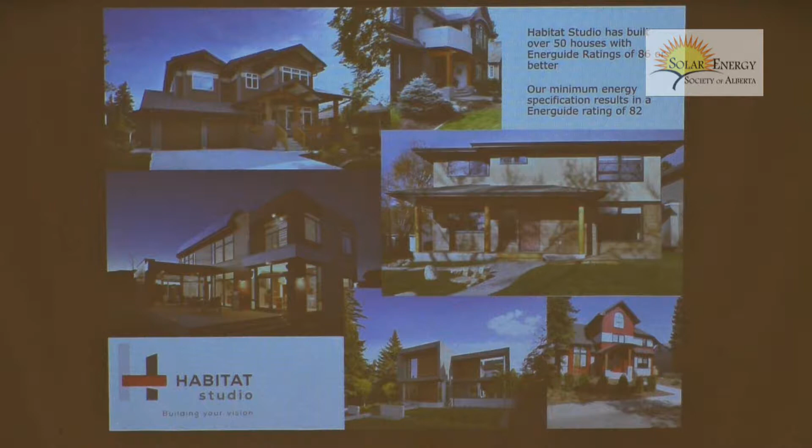So as Rob said, we've built - we're actually over our minimum Energuide rating, it's actually around 82. We still will build houses like that if people are utterly uninterested in building the house we would like, which would be about Energuide 86, and we've done about 50 of them now.

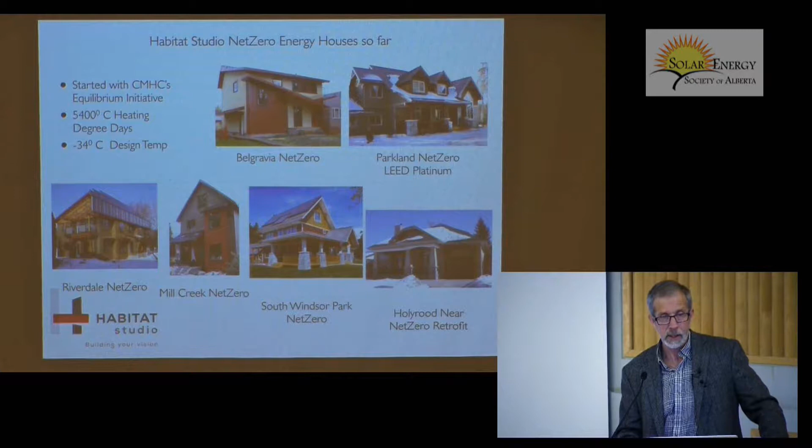They're getting to be more common than the Energuide 82 houses, and we started our net zero journey in 2007 with the Riverdale project, built under the CMHC Equilibrium Initiative. That project brought a number of other projects sequentially, one at a time, about a year per project, and it allowed us to learn at a manageable pace and try new things, finally refining what we think is a best practice approach that should be good for quite a while.

And it's one of the things that makes me confident that net zero really is ready for prime time. So right now we're working on 4 more. 3 of them are nearing completion, should be done in a month or so, next couple of months at the most, and 2 of these are on the Eco Solar Home Tour.

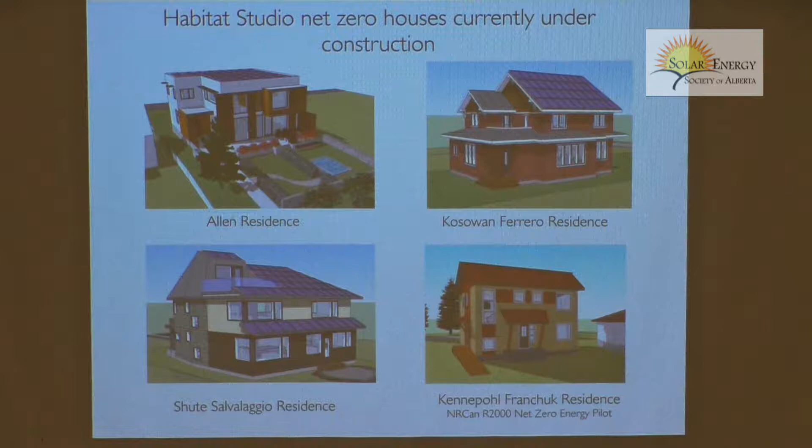One of them is being built under the NRCan R2000 Net Zero Energy Pilot Program, and the owners, Dietmar Kennepohl and Roberta Franchuk, are here tonight, and I want to especially thank them for letting us do that on this project.

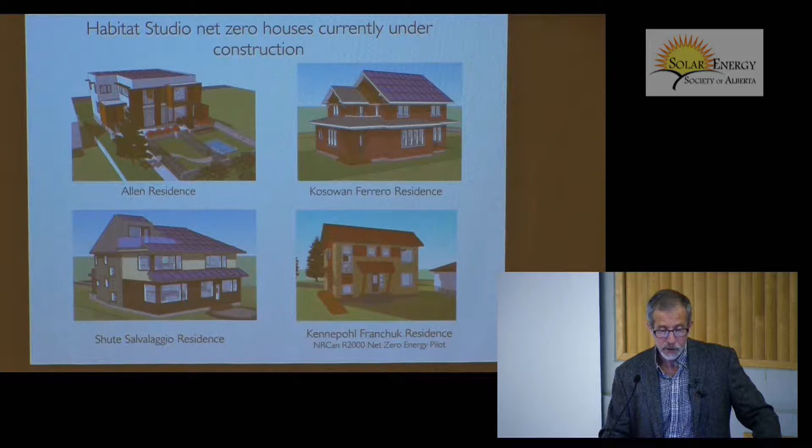Just to zoom out to the rest of the world, I've been involved with the Net Zero Energy Home Coalition for quite a while. It was started back in 2004 here in Alberta, and has been a booster and an information source for net zero energy for a while.

In the last little while, it was always intended to be North America wide, but it's moved over to almost entirely the U.S. What happened was the Canadian Home Builders Association started a Net Zero Energy Council, which took most of the funding, so now this is mostly an American organization. I was just at the summit in Boston a few weeks ago, and there's a fair bit of pretty cool stuff going on in the U.S.

There's a lot of net zero energy activity. There are a number of small builders who are doing exclusively net zero energy houses in the Northeast and making a go of it. Some of the great big mass home builders that build 10,000 houses a year have now got net zero energy offerings, and the U.S. DOE, the Department of Energy, has gotten into it in a pretty serious way, in advocacy, encouragement, and training, and I'll talk about them in a bit.

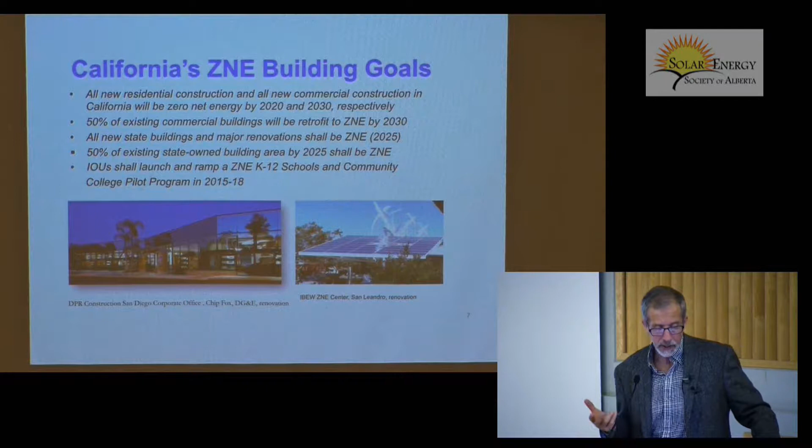But California has committed to net zero energy in all new residential construction by 2020, 5 years from now, and including by 2030 for commercial buildings. They're aiming at a retrofit program that will start to take existing buildings to net zero energy, and they've been very proactive in doing this. It's been remarkable to me, in the sort of home of the brave, land of the free, that they've taken such an apparently intrusive approach to this.

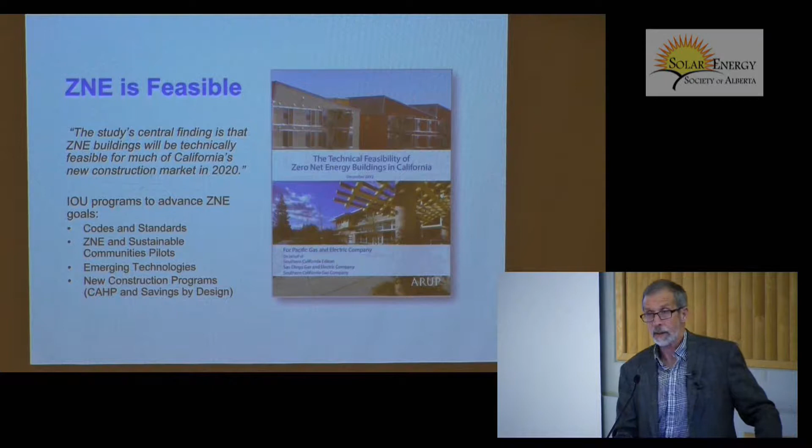It's very encouraging. But California is actually seeing the effects of climate change worse than anybody else. They've also got it easier than anybody else, particularly in the solar department and the heating department. But I think it's still really encouraging. A large number of trends that we see in North America start in places like California, and it's very hopeful. So the other place that's a real hotbed is Massachusetts and the Northeast in the U.S.

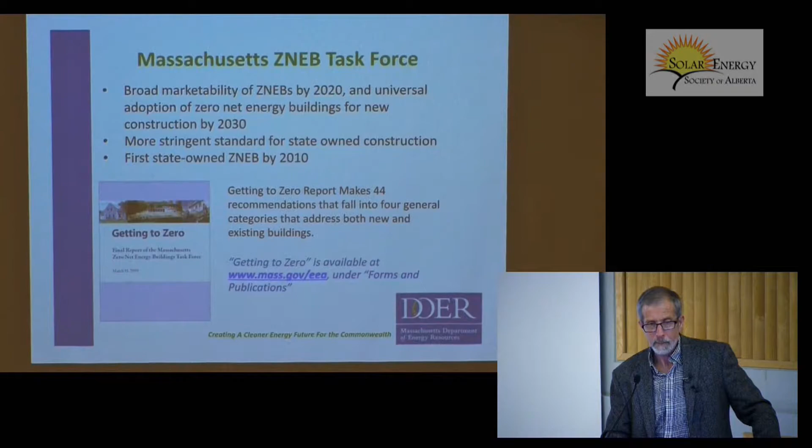Massachusetts has a very active program encouraging net zero energy buildings. And it was kind of funny in this session, I ended up chairing this, moderating this policy and program session, and I, who know absolutely nothing about policy or programs, got to see these representatives from California and Massachusetts kind of having fisticuffs over who had the best program. That was encouraging in itself.

But the utilities down there are getting quite active as well. They're seeing conservation as an alternative to building more generating capacity, and looking to the day when they're not in the business of really selling energy so much as managing the grid and keeping it reliable, more like an internet provider where the content comes from somebody else, a lot of it from renewables, and they make their money on a monthly fee. And as such, they've got lots of programs that they put real money into that have incentives and encourage people to do the right thing.

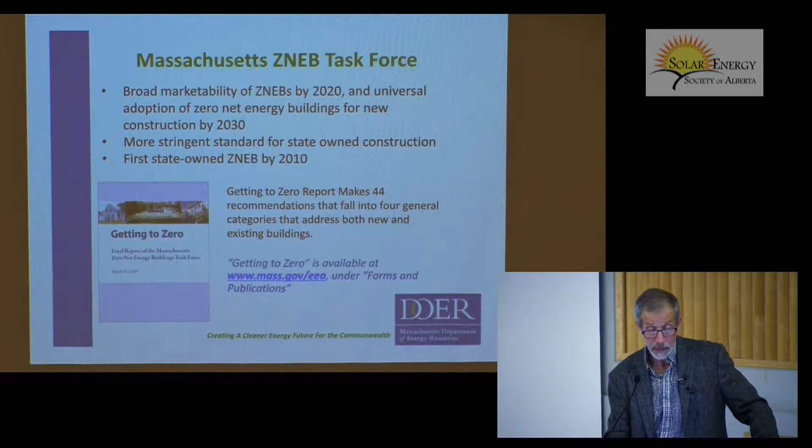One place that was really remarkable to me was the city of Cambridge, Massachusetts. They've committed to carbon neutrality for the entire city. They do have some advantages, including transportation. They're a relatively small city, about 100,000 people, a fairly compact city, and they've got a highly educated population. It's a city full of scientists, basically, who totally get the predicament. And they've got terrific support from their state government.

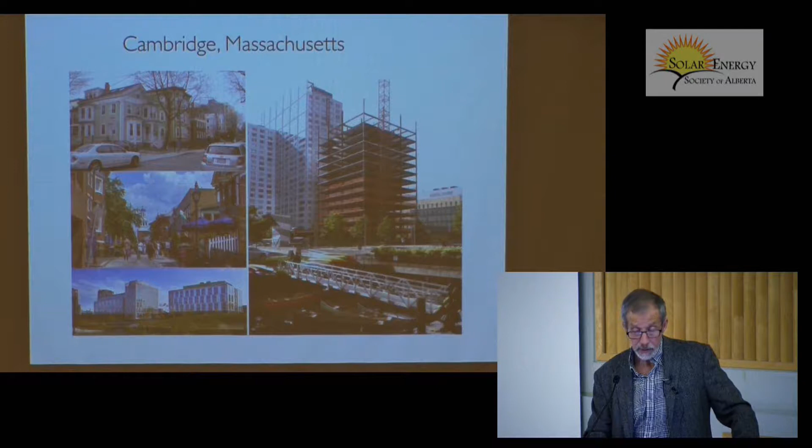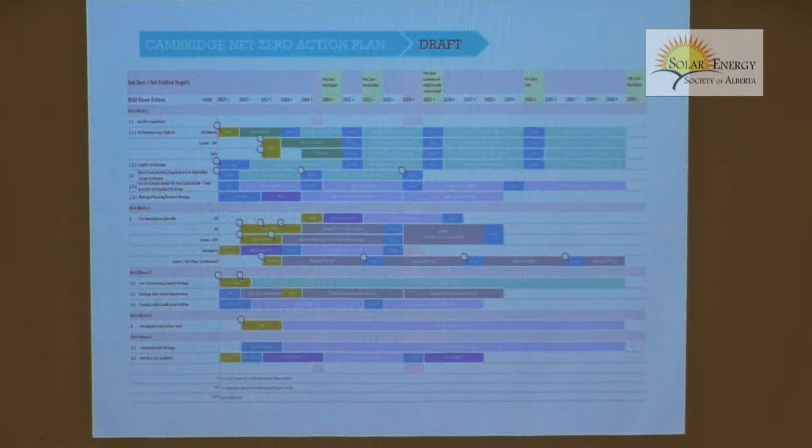So they've mapped out a step-by-step, sector-by-sector approach: transportation, buildings, commercial, institutional, everything. They started with an energy audit of the entire city to establish benchmarks, and then they've developed reduction programs across all of the sectors, and an action plan. And the work that they've done has been, I think for others, basically a gift to the world in terms of the policy work that they've done. We'll be able to take that kind of material and plug into it really.

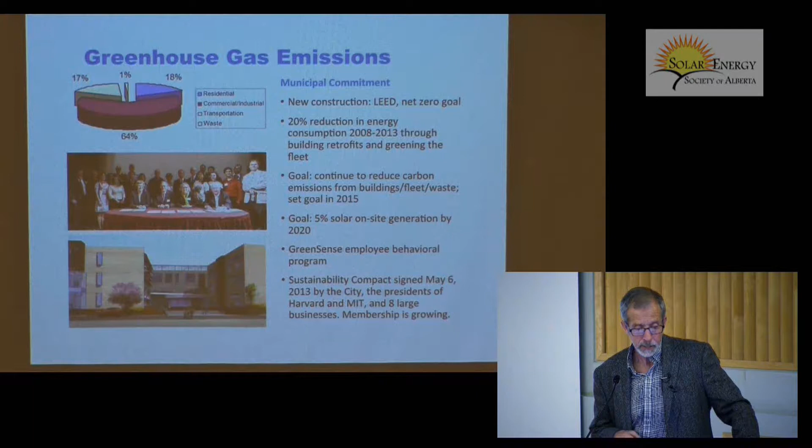And for them it's about greenhouse gas emissions. They've got terrific buy-in at the municipal level and from big partners. So their map looks something like this. They expect to reach 70% of carbon neutrality by 2040.

Watching this as an Albertan, I had a complex mix of emotions. One was hope that somebody's finally doing something somewhere, an admiration for the leadership, and then envy that it's happening there and not here, and then a little bit of shame that we really haven't got started. Did you know that Alberta is the only jurisdiction in North America that has no incentive or encouragement programs for retrofitting houses?

Yeah, it's hard to imagine. One of the bright spots is here in Edmonton. The new energy transition strategy looks really good. It's hanging in the balance at City Council right now. I think it's really important that we support the people at the city who have developed it and brought it forward. If you can get out to that City Council meeting, and I don't know the date of it, write letters to the paper, write letters to your councillor.

It's really critical that our voices are heard in the right direction. Otherwise, we could be waiting a long time. It'll be helpful, I think, if the city acts—there's a better chance of the province moving.

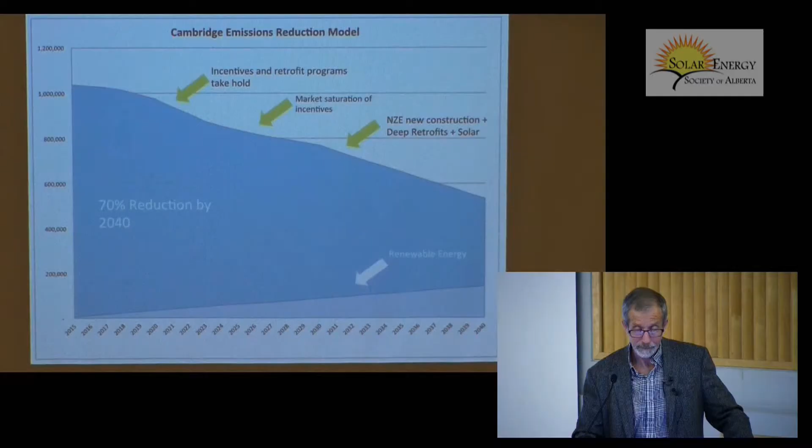It's really important. So the U.S. Department of Energy has a branch that used to administer the Energy Star label, similar to our EnerGuide rating—not quite the same, but basically a package of upgrades to houses, and they also do labeling of equipment and that sort of thing. So they've taken this Energy Star program and turned it into something they call Zero Energy Ready.

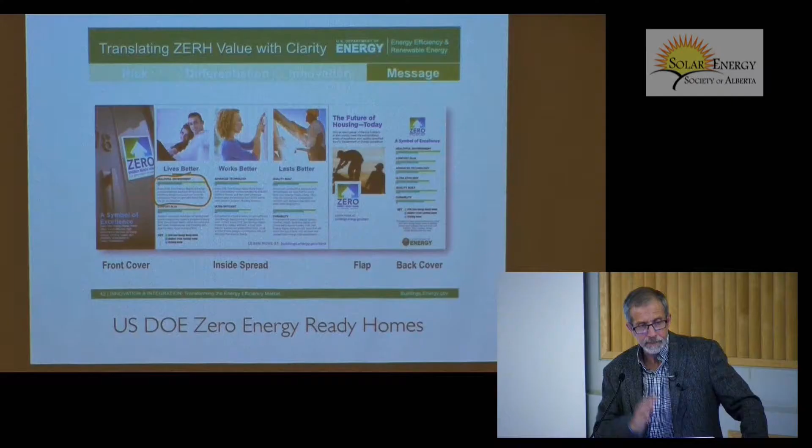They opted for a slightly different term because they're worried about liability—you can build a net zero energy house, but if the people living in it aren't net zero energy people, there's a good chance it won't perform that way. So they took this safer, more inclusive role, because it also includes houses built to a certain standard that have demonstrated that if you were to put renewables on them, they could be net zero. This is a big deal when a big player like this gets into the net zero space.

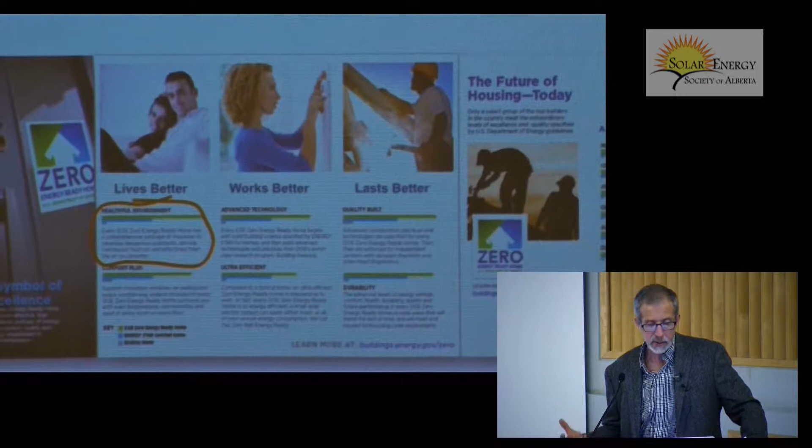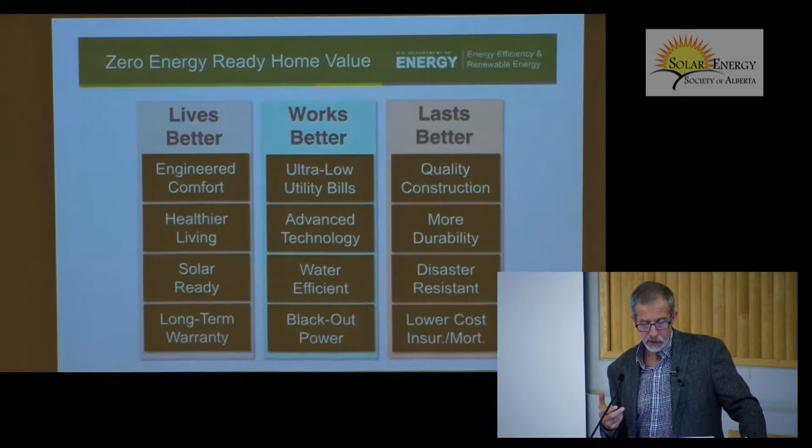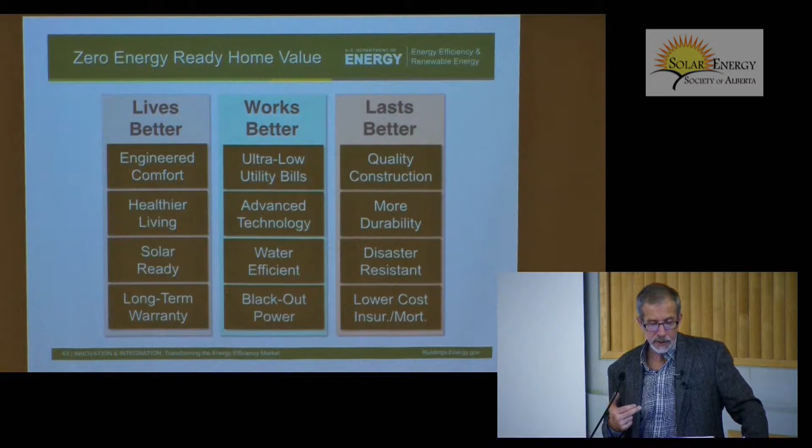The builders need training. They need to pass a course, all the buildings are rated and inspected, so you've got basically Uncle Sam's stamp of approval that you're getting what you paid for. They realize—and Sam Rashkin, the chief architect at the DOE, who's really the driver for this stuff, understands—that builders can't sell these things unless people want to buy them. So he's done a lot of work establishing a value proposition for these houses, similar to the work done in Canada for the R2000 program.

There's no doubt that these houses are more comfortable, healthier, cheaper to operate—they're just plain better houses, and it's time that they be sold that way. It's frustrating as all get out that, like the R2000 program, we can't actually sell this stuff on the basis that, to me, is real value: the fact that it's something we have to do to keep the planet habitable.

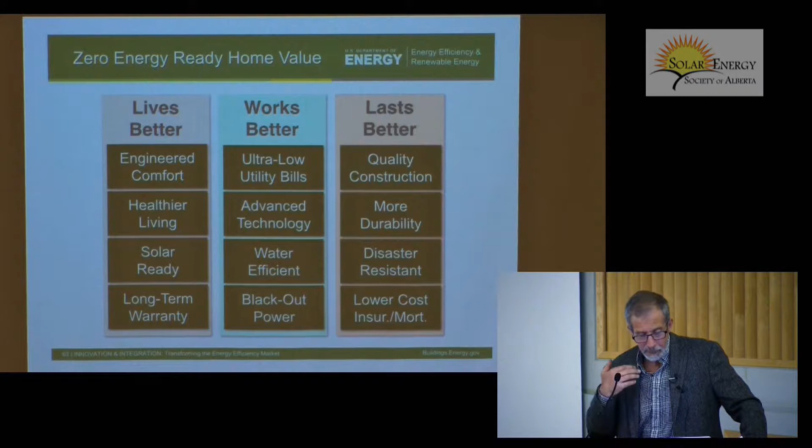The established wisdom seems to be that you can't talk about this stuff—you can't sell it on the basis of being better for the environment or saving the planet. You've got to sell it on these kind of side benefits and hope for the best. I really dearly hope that'll change.

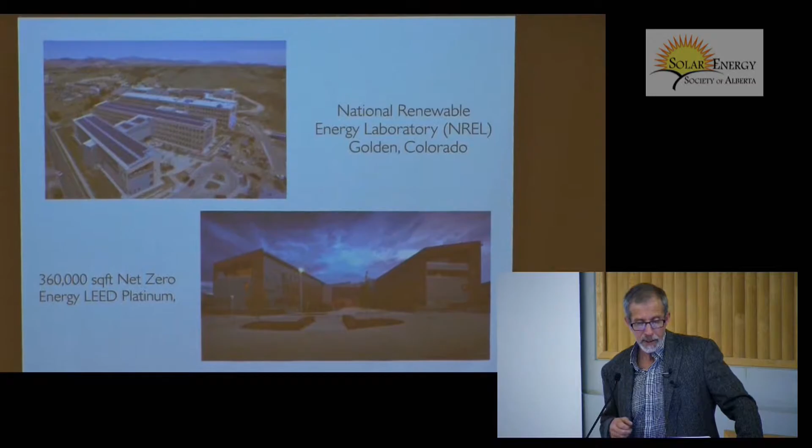So there are also, in the U.S., a number of commercial buildings that are net zero energy—not very many for the size of the country—but the biggest is probably the National Renewable Energy Lab. It's kind of appropriate, like who else should build net zero? That was built, I think, in 2010, and they were given a budget with no extra money in it, yet they were able to build a net zero energy building within that budget.

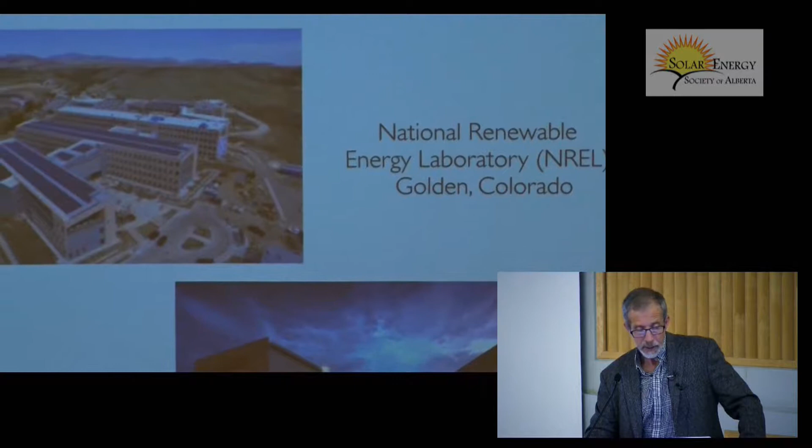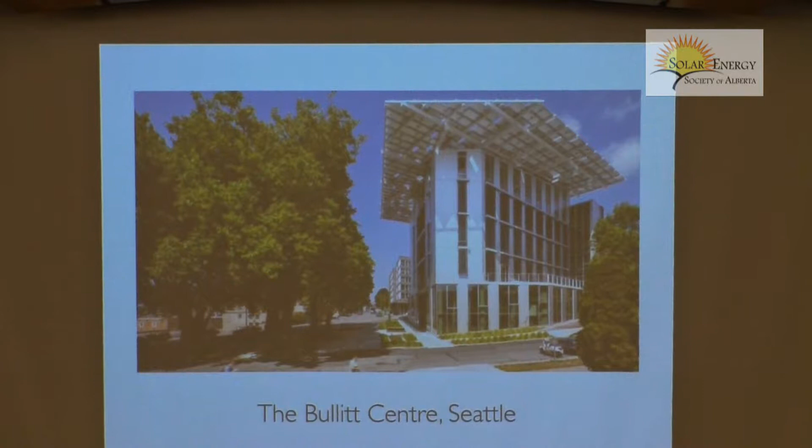Now, another one you may know about is the Bullitt Center in Seattle. This is a LEED Platinum, Living Building Challenge certified building. It's net zero. You can kind of see what happens when you try to go with a multi-story building and get to net zero—you run out of roof area pretty fast, because the process loads in the building, the lighting, even the cooling and heating go up, but the roof area doesn't, unless you can do something like this.

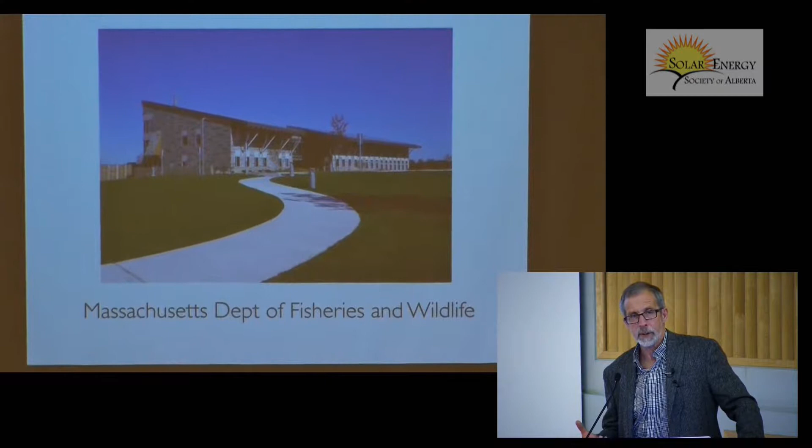Another interesting building we saw in Massachusetts was the Department of Fisheries and Wildlife, in keeping with the Massachusetts state commitment to not only encourage this stuff, but to put their money where their mouth is. This building is also very high quality, beautiful, daylight filled, very comfortable, and net zero energy. I think it was finished in 2013. They've got a year of data—it's actually net zero, and a great example for the rest of it.

And then right here in Edmonton—I'm not going to talk about this, just a sneak preview—we've got our own net zero energy commercial building. So if we can do it at scale, we can sure do it.

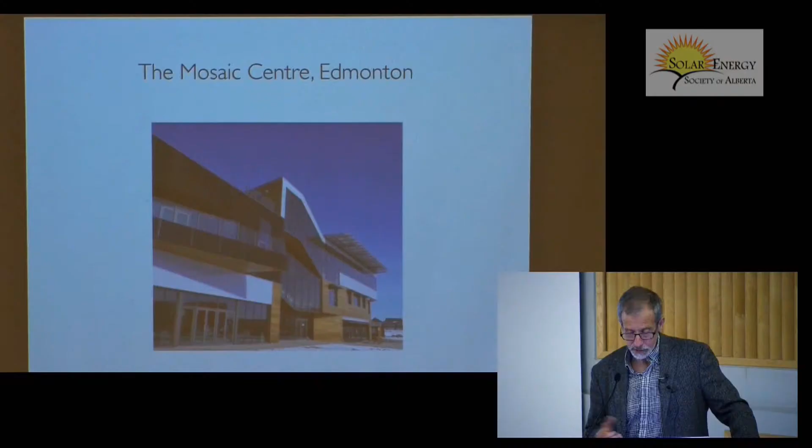We can sure do it on houses. So back here in Canada, the CHBA has established what they call a Net Zero Energy Council, and their goal is to bring resources to builders so that they can do this more cost effectively. That involves training and information sharing. They're also trying to help build the market.

Everywhere we turn, really, we've got the same problem. We know how to do this stuff now. It's not a technical problem anymore, it's a marketing problem. We need to convince people to act in their own interest. I don't know, you say something like, we need to build houses like this or we're all going to end up fighting over scraps of food in the desert. I don't know what it takes, but we need to work on that marketing piece that will start to get people acting in the interests of their kids and grandchildren.

Anyway, the other thing that NRCan is doing, or that the CHBA is doing, is working quite closely with NRCan to develop a new net zero energy label based on the new EnerGuide rating system. The rating system is undergoing a change, and we're going to see this come out end of this year, early 2016.

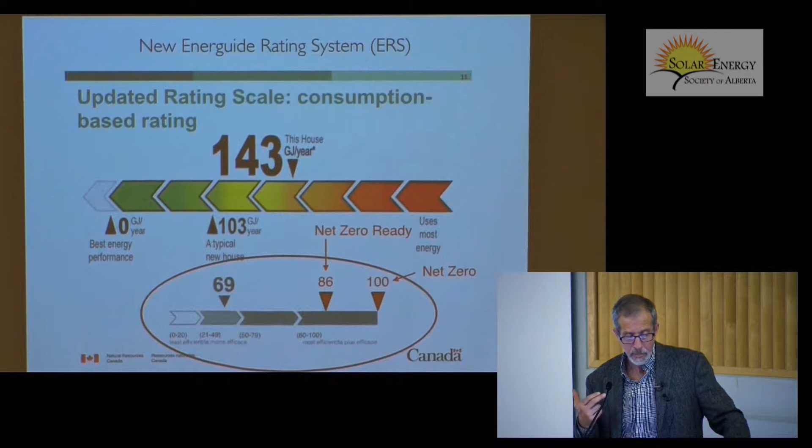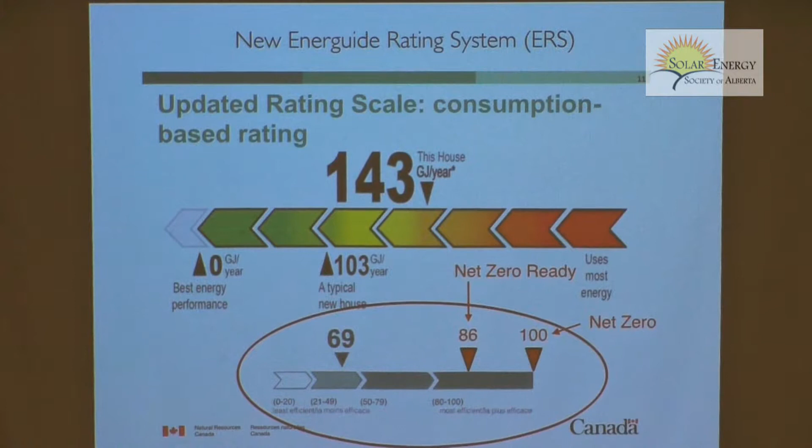Nobody seemed to understand the old EnerGuide rating system. It wasn't a straight line, it was logarithmic, and it took quite a bit of difference to change a house from EnerGuide 86 to 88. Also it was kind of counterintuitive that net zero would be 100 and the worst possible house you could build would be 0.

So they flipped that around and made it a consumption-based rating. Your score is basically going to be how many gigajoules a year you use. If you have a net zero energy house, it's going to be a 0 gigajoule house. They'll also turn that into a label, they've done a lot of thinking about it, and there's all kinds of other information on it. This is just a snapshot of part of it.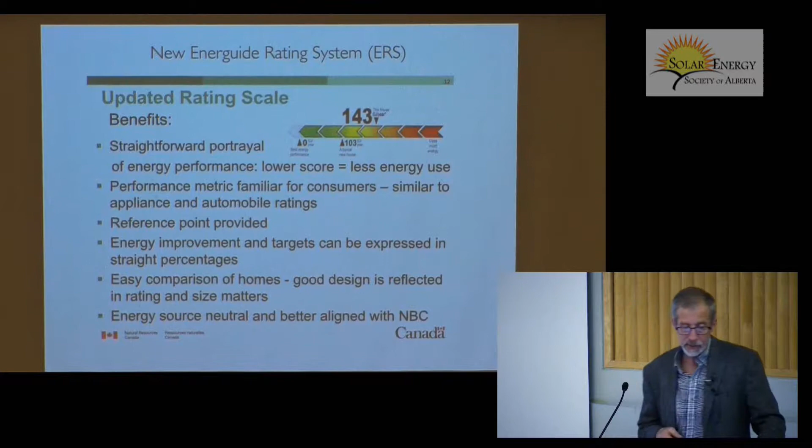But it will be much easier to understand, and it will be the foundation for the net zero energy label that you'll be able to get along with your new EnerGuide rating. It's got a number of benefits. It's very similar to the appliance and car ratings, gives you a reference point to an average house, and you can express improvements in just percentages.

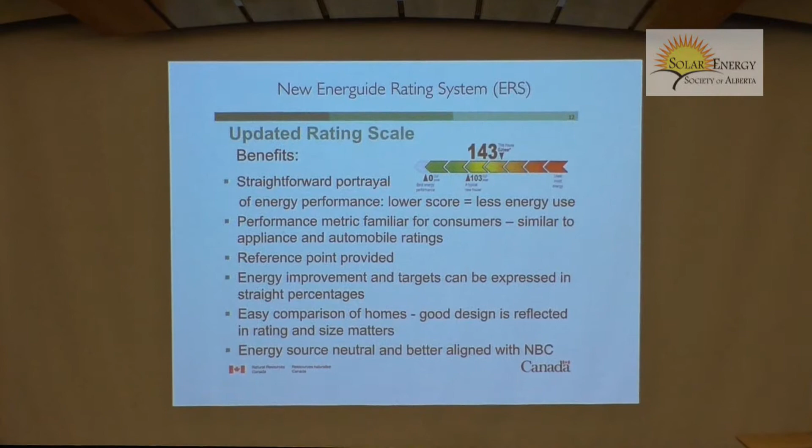That didn't work when it was logarithmic. The old EnerGuide rating system was also different depending on the size of the house, whereas this is just going to be straight consumption. If you've got a smaller house, you're going to get a better EnerGuide rating, and that, I think, is as it should be. But it will not look at the energy source in any way - it's not going to compare natural gas to electricity or coal-fired electricity or heating oil.

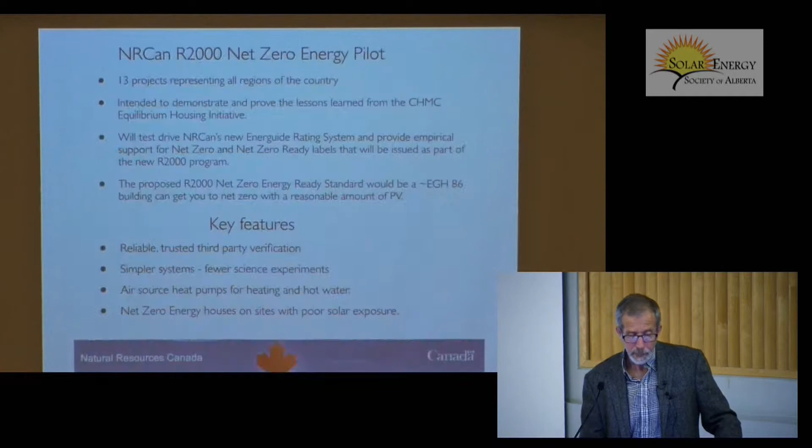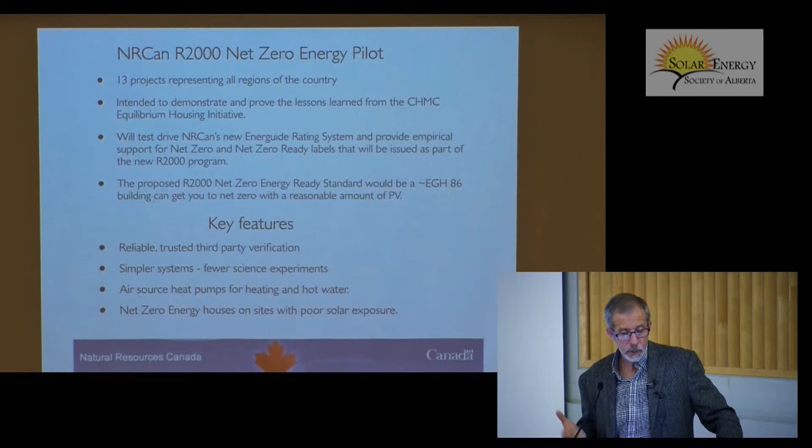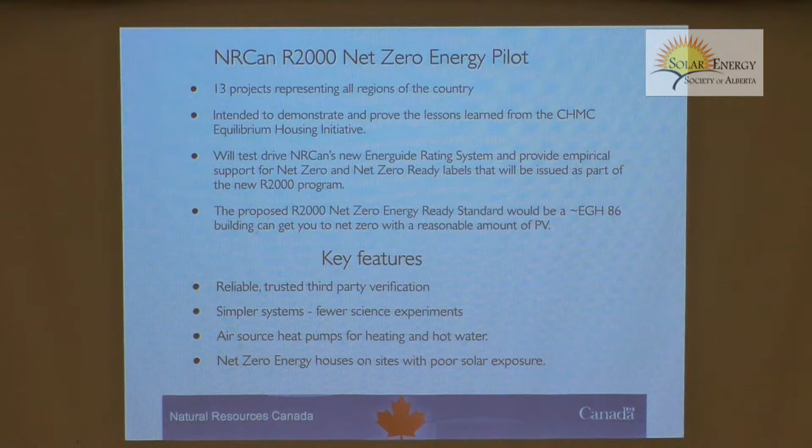So the Dietmar and Roberta's house that we're building is part of another national program run by NRCan, and all of the houses will have to meet the old R2000 or the new R2000 standard, which is now EnerGuide 86 in the old scale. There are about 13 across the country. Dietmar and Roberta's is going to be the first one finished.

The idea is that there are no more science projects - this is road ready, off the shelf solutions. It's going to test drive this new EnerGuide rating system. The EnerGuide or Net Zero Ready label they're hoping to come out of this would be at least an EnerGuide 86 on the building without renewables, and then a demonstration that there's enough capacity in the roof to install enough renewables to get you there.

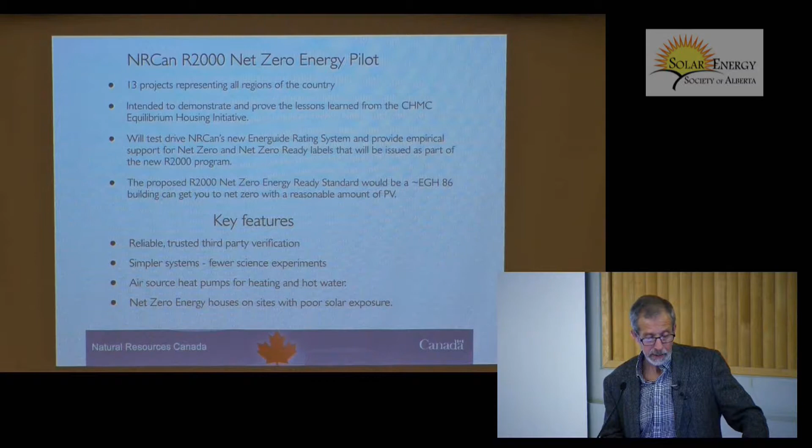Yeah, so this is a rough look at Dietmar and Roberta's house. Again, the house will be on the tour, so you'll be able to have a better look at it on May 30th. It's about 2,250 square feet with a finished basement.

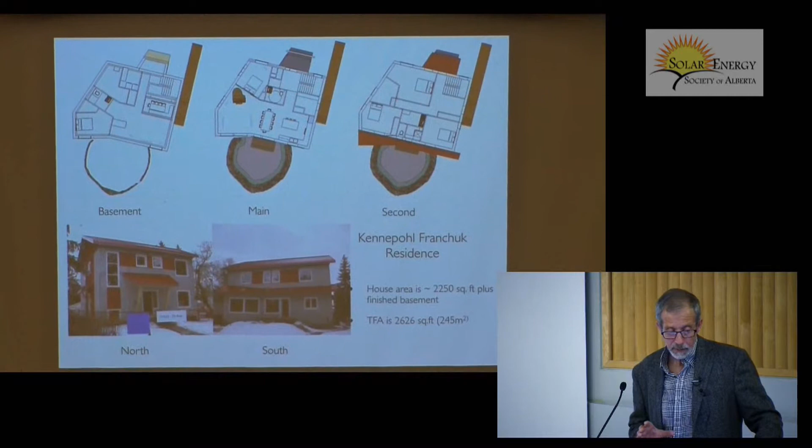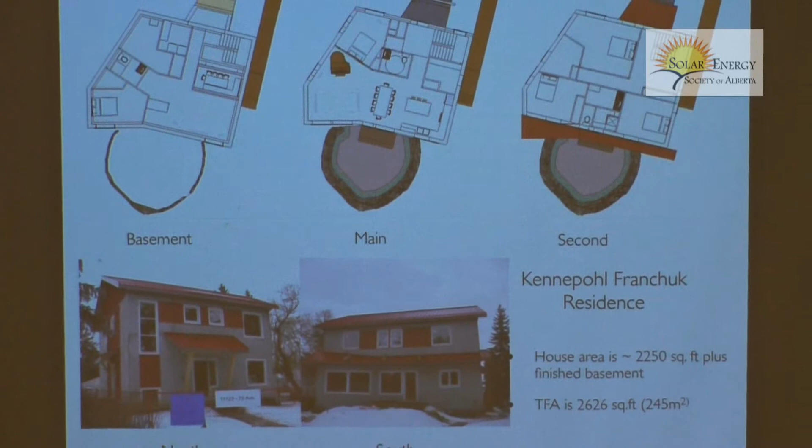It's getting close to complete. We need to do the finish coat of stucco and obviously install the PV. The house is custom designed to their lot, which is a kind of a funny shaped lot. There's a bunch of trees across the street, so there is some shading. We took down a great big elm tree that we've actually sawn up and made into the railing and stairs and a few other things in the house that we're pretty proud of. You'll be able to see that at that time.

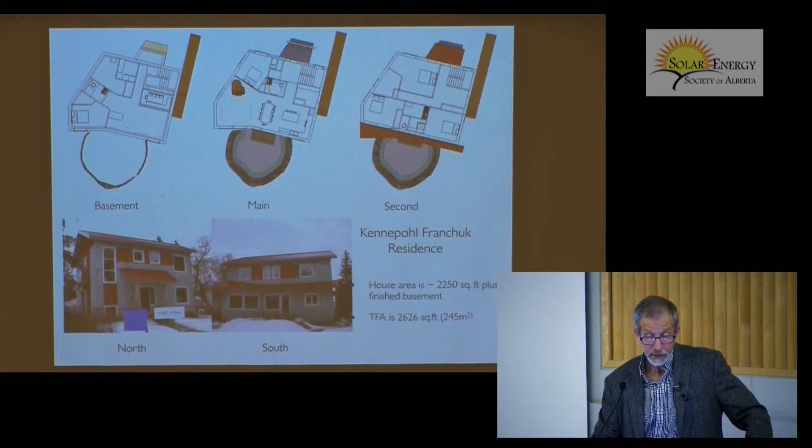Now I'm going to go to a little more territory that we've gone over before, but I think it's important for people who aren't here to go through the basics. We've figured out how to do this in a really straightforward, step-by-step manner that's not that much different from designing an ordinary house. It's just one more constraint, and if you attack it in the right order, it's relatively easy. We found this out the hard way.

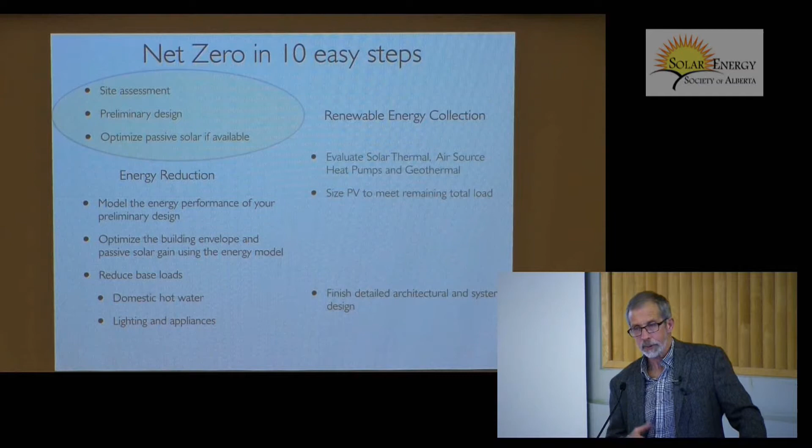We did it a few times and noticed that you don't design the PV system first. I'm just going to run you through these steps and a few things we've noticed along the way. It doesn't need a big charrette—it's ready for anybody working anywhere. And the fact that we now have, we counted 34, 35 net zero energy dwellings in the Edmonton area now, is a testament to the fact that we know how to do this.

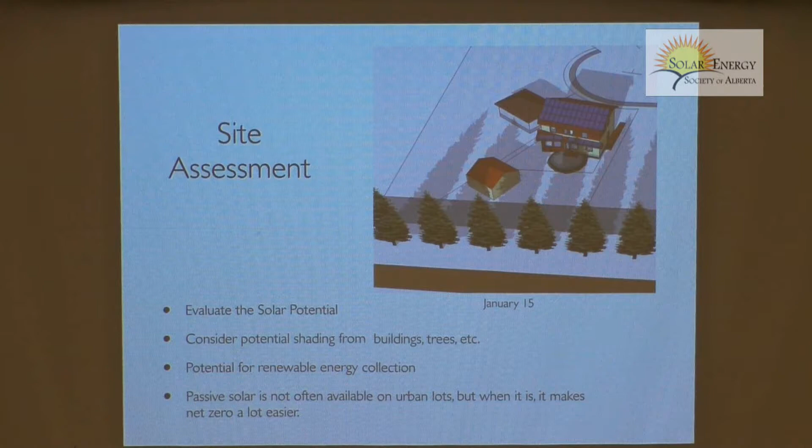We can do it. So the first thing is to evaluate the site, look at the potential shading, look at the amenities for designing the house, and I'm always looking for passive solar because that's the cheapest, easiest way to get to net zero. Then the preliminary design happens with that in mind—keeping it simple and compact, and thinking about where the PV is going to go. It helps a lot to keep the living spaces on the south side if that works out.

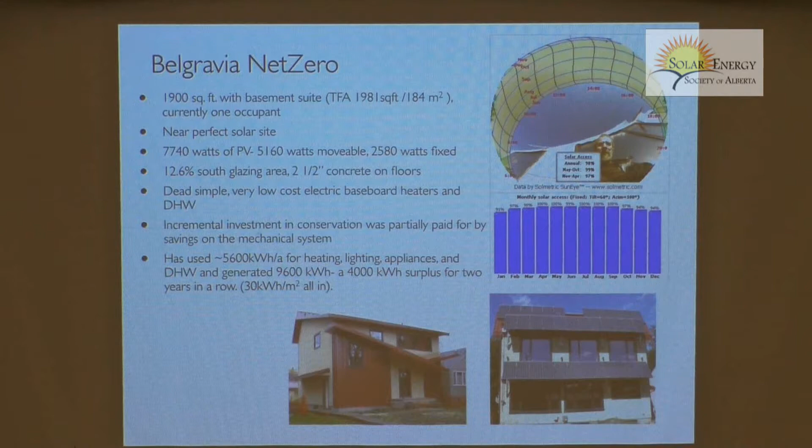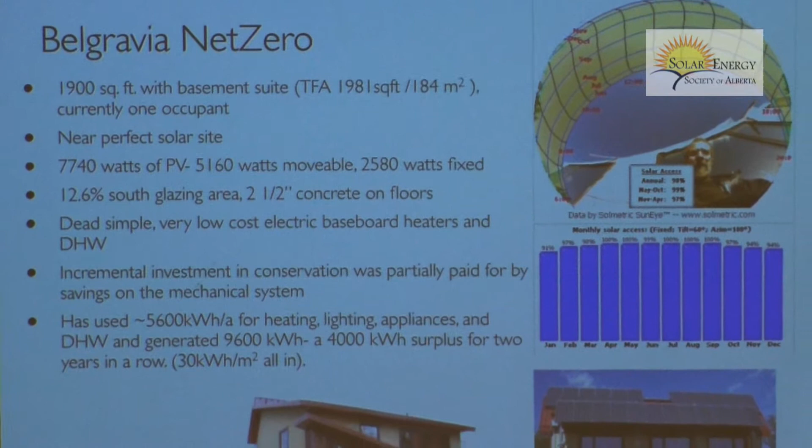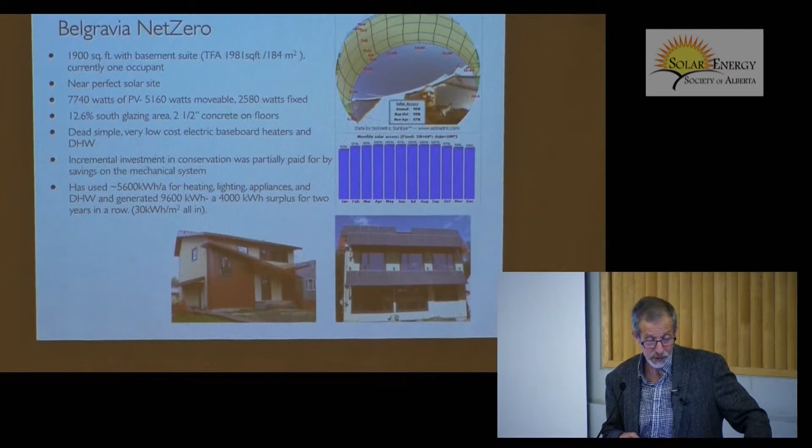It's not critical anymore, but the case in point is our net zero home run—this was our third house. It's a house in Belgravia that over the last 3 or 4 years has produced close to 10,000 kilowatt hours a year of electricity and used about 5,600. Part of that is the owner, who is very conserving—I joke that he probably showers at the Kinsmen—but even so, with over a 4,000 kilowatt hour surplus, a family of 4 could live here comfortably without any sacrifices whatsoever. The main reason this house is so successful is that it's a perfect solar site.

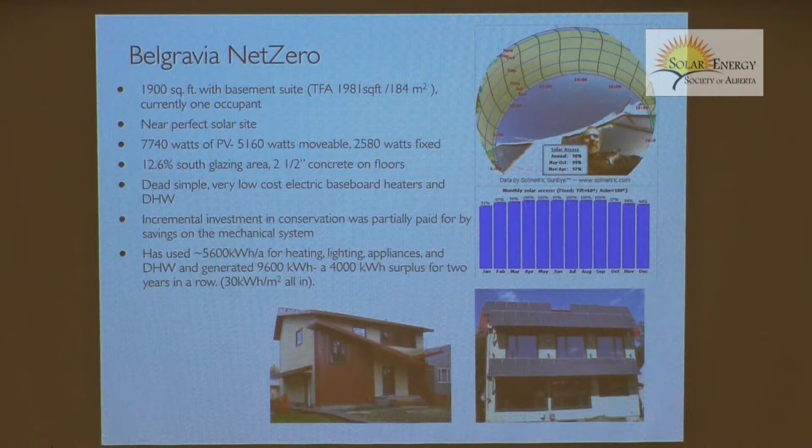Not only is the PV system producing very well, but it's getting over 50% of its annual space heat needs through the south-facing windows. Unfortunately, when we figured out that formula, we thought, okay, now we've got it. But looking around, there isn't one site in 20 in Edmonton that would be anything close to that good. So we obviously needed a plan B, or it wasn't going to go anywhere.

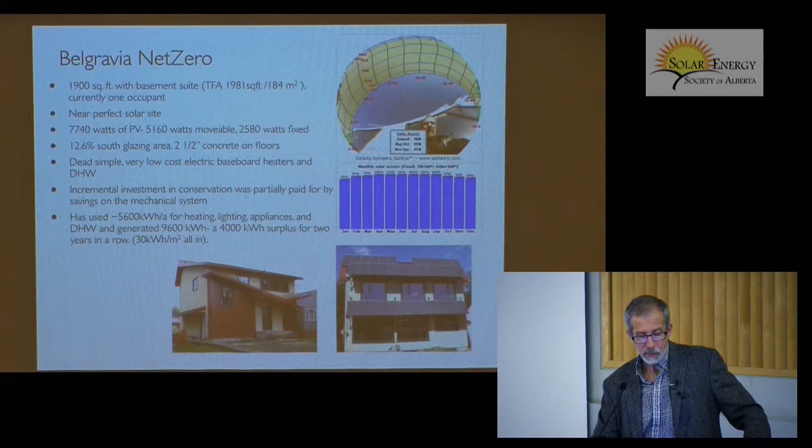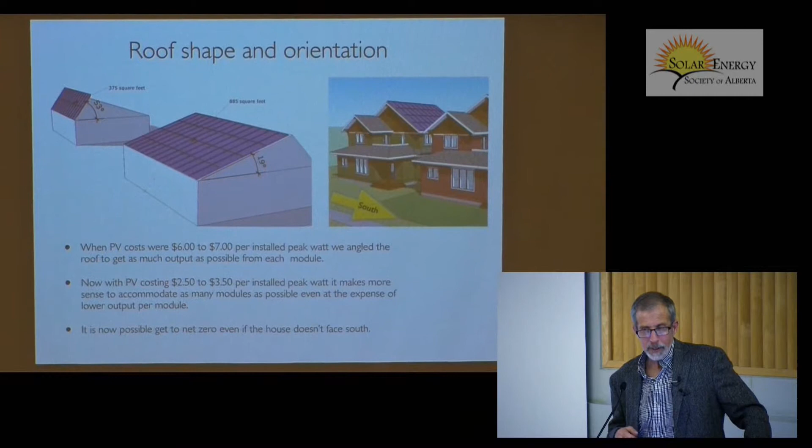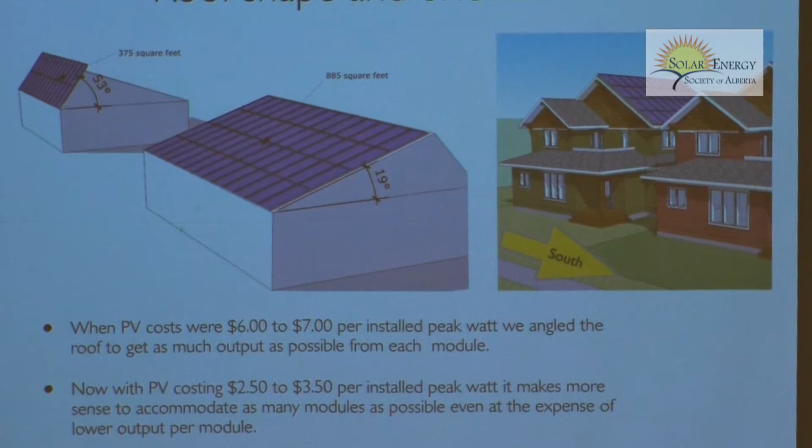So going along in the steps, thinking about the roof shape—when we first started out and PV was costing $6 or $7 per installed peak watt, we were putting it at the maximum angle to get every little bit of juice we could and restricting the area. Now that it's come down to the $2.50 to $3.50 range, we want to get as much area as we can and not worry so much about maximum production, because it's overall so much cheaper. So we're actually shaping roofs almost exactly the opposite to what we did.

The other thing is that now we're finding that we can get to net zero on lots that face east and west, and Landmark's doing this on a number of them. We'll get to why you can do that now and you couldn't do it before in a second.

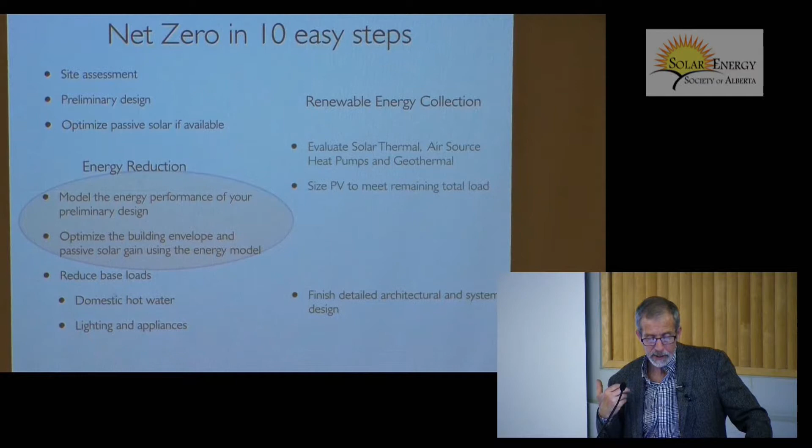So after you've got a rough idea of the shape of the house, the next most important thing to me is energy modeling. I've said this so many times—if you don't start with a good energy model, you'll never get there.

I was in Manitoba and Winnipeg before Christmas giving a couple of talks, and in those sessions I had 3 separate families come up to me afterwards asking for advice on houses they had already started. One of them was a mechanical engineer, and he wanted advice on air tightness because he'd heard how important that was. But he built this goofy wall system—2x8 with all kinds of wood in it, thermal bridging out the yin-yang—and he was committed, couldn't do anything about it, but he wanted to make the house airtight. I thought, God, if a mechanical engineer won't start with an energy model, what kind of hope is there for ordinary people?

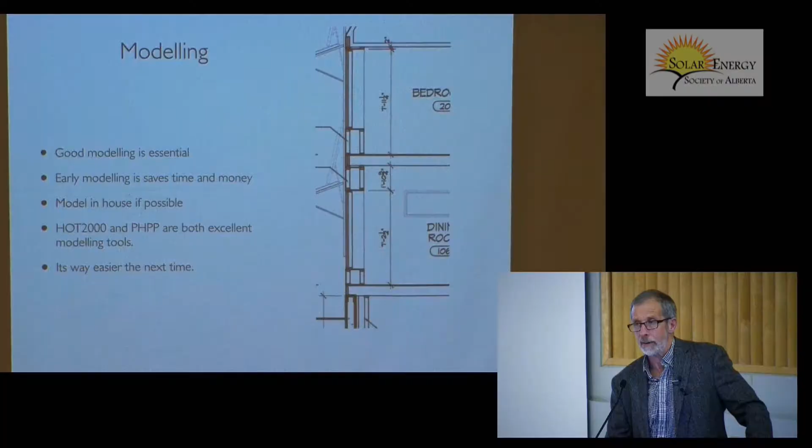I sort of understand it when somebody—one was a farm couple—they'd read some stuff and gotten along, and they could have saved themselves so much money and gotten a much better house if they had just done this energy model before they started. It's critical at every scale. Dennis will talk about it on that scale.

So it's critical to find out where every component stands—the way it works roughly is that you take the energy model, and from it you can find out how much energy any component of the house uses. So, for example, the heat loss through the basement floor.

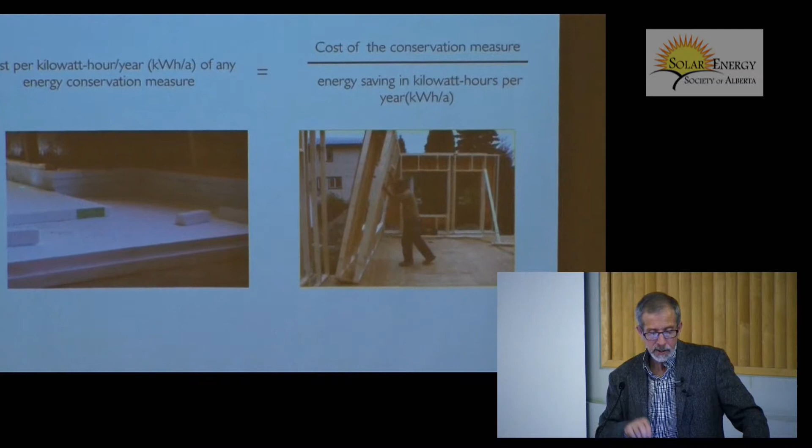You would try, look at the model, see how much heat you're losing through the basement floor with one level of insulation, say R10, add another R10 so you've got R20, see how much energy you save, find out what that costs, and divide the cost by the energy saving to get a cost to save a kilowatt hour a year, every year, year in, year out.

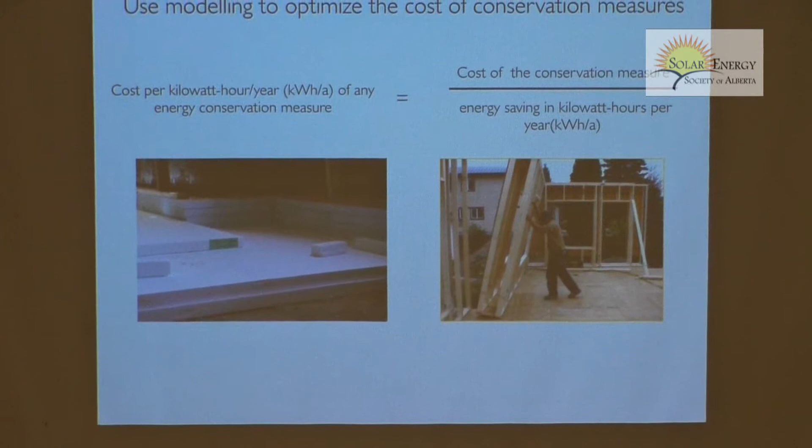And then you do that for the walls, for the roof, for the windows, even for the mechanical system, for air tightness. When all of those cost measures are the same, then you've got an optimal cost. Otherwise, you're in real danger of putting way too much insulation, spending too much money in one area and not enough in another. And that's what this mechanical engineer clearly didn't even start to do.

It's highly educational too. For most people, you probably need to get an energy advisor to do it for you, but you can play with it after that, and it's a good thing for builders to do at least once—you don't have to do it for every project. After a while you get a feel for where the levels should be, and they'll vary from builder to builder depending on your cost structure too. So it's really worth doing, just learning so you know why you're doing what you're doing.

So nowadays there's all kinds of options for building energy efficient walls. I'm not going to go through them all here. They all have their different advantages and disadvantages, and the choices will vary somewhat with your cost structure, your site, and also the target—which of the, even your value system. We'll look at the pros and cons of a couple in just a sec.

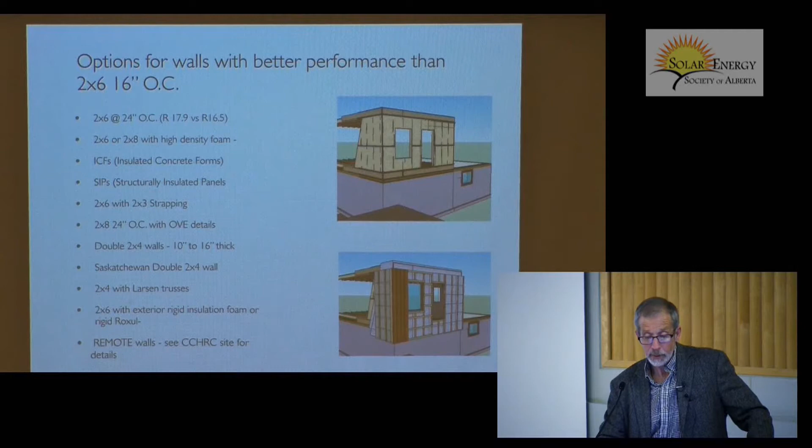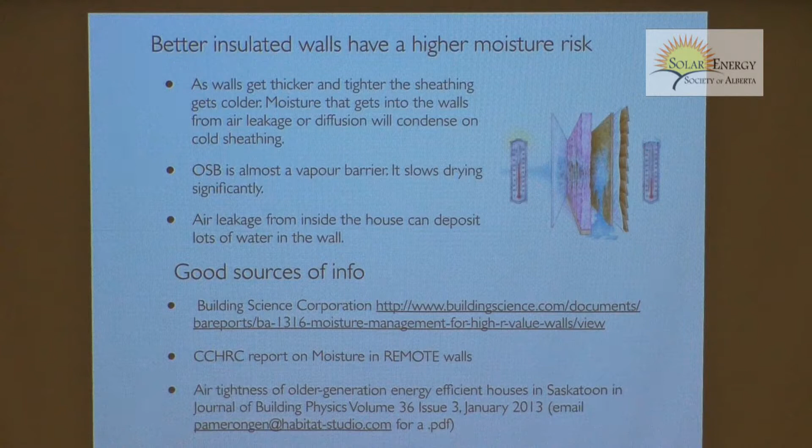But just a caution: when you start adding more insulation to a wall, you can start to increase the risk of moisture damage within that wall. That's one of the key and most valuable lessons of the whole passive house approach—as the wall gets thicker with more insulation, the sheathing gets colder. If you do have an air leak in that wall and it gets out to that cold sheathing, it's very likely to freeze and melt or freeze and accumulate, and you've got water in your walls, and nothing is ever perfect—it better be able to dry out before it does some damage. It's possible to do analysis on this. There's lots of good material, but it's just something that whenever you think you've got a bright idea about building a better wall, you need to check out.

So a couple of the common higher R-value walls, just to contrast the value system: lots of people are using high density spray foam. It's got some advantages—it can work if you're on a narrow site, some of these skinny houses, I see it being used and it kind of makes sense there. It doesn't do much for thermal bridging, so you get a lower effective R value than you would with an ordinary wall. It's pretty high embodied energy, and it's not as tight as you'd think—it still needs a fair bit of remedial work.

Our favorite, and the one that we've done 50 times now, that we think is the lowest incremental cost to get R40, is the Riverdale, as the CMHC called it, the Riverdale deep wall. It follows normal construction, it's airtight, it's very little more lumber than a typical 2x6 16-on-center wall, very low embodied energy, and very minimal thermal bridging. It does take more labor.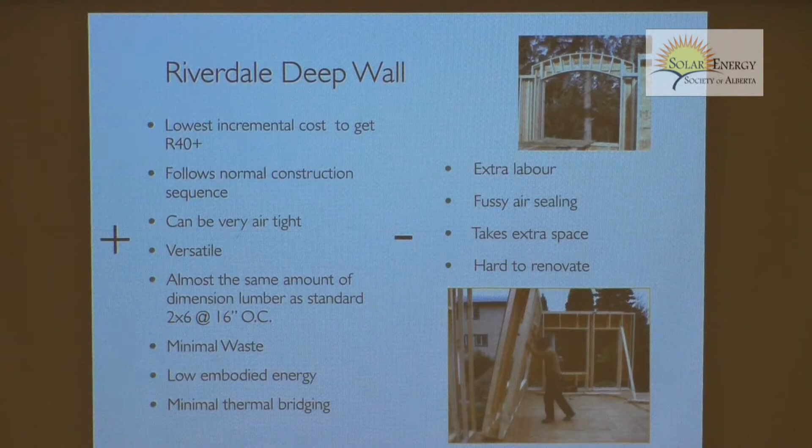The air sealing on it is a little fussier than some of the layered approaches, but we're able to get near passive house levels of air tightness with it, and it can take up big space if you're on a skinny lot. So another thing to keep in mind is thermal bridging control.

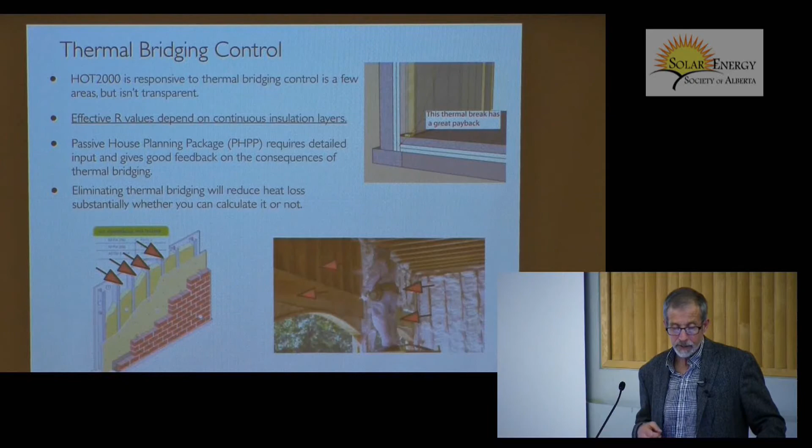Modeling won't tell you this. HOT 2000 anyway will only give you a vague idea of where thermal bridging is going, it won't break it out. The passive house software is great for that. But as you get higher R values, and I'll show you a little graph here in a second, the last few remaining contact points where the insulation layer is not continuous will really eat into your energy budget.

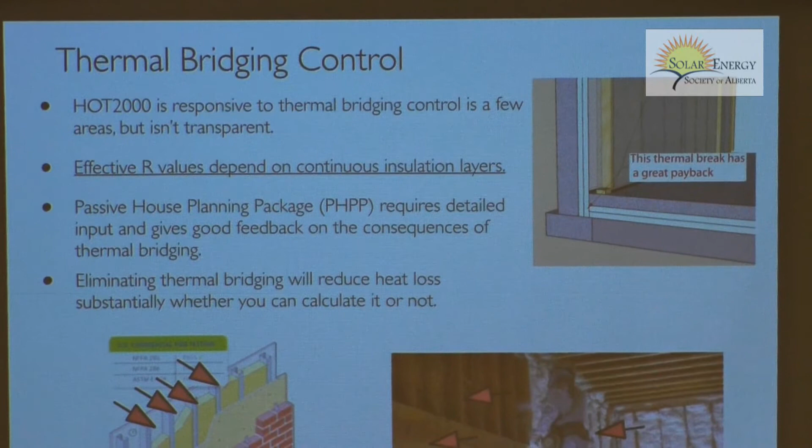If you have a look at this slide here, if you look at a typical R15 ordinary wall, the heat loss through thermal bridging is only maybe a quarter to a fifth of the total heat loss. As that R value gets up into the range you want for net zero energy, if you haven't done anything about the thermal bridging, it can be half. It's really worthwhile to take that in hand.

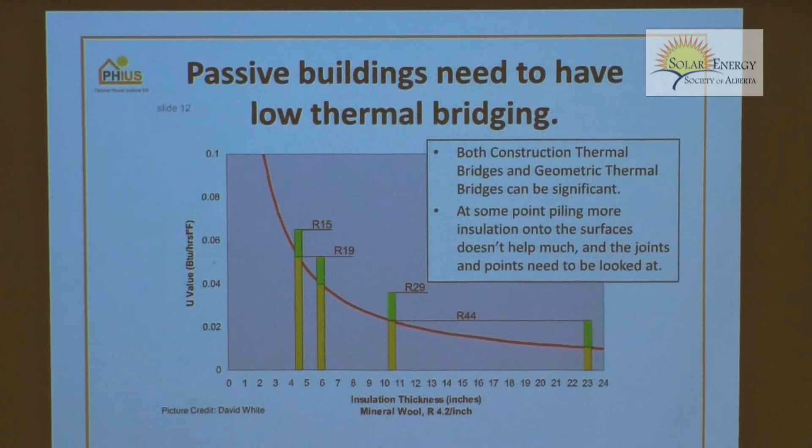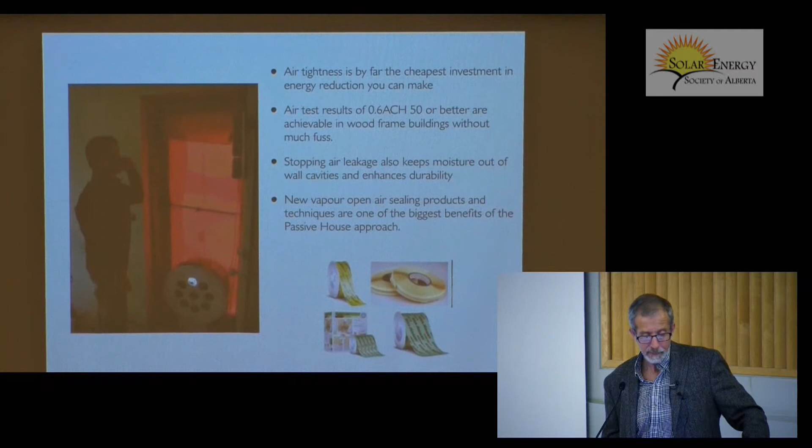And then air tightness, by far the cheapest energy reduction you can make. It's not that hard to get to 0.6 air changes an hour these days. And it has a huge side benefit, which is that most of the moisture that's likely to get into a wall is through air leakage. You can move a lot of water with household air leaking into an insulated wall. If you've stopped that by stopping all the air leakage, you've really made your wall a whole lot safer.

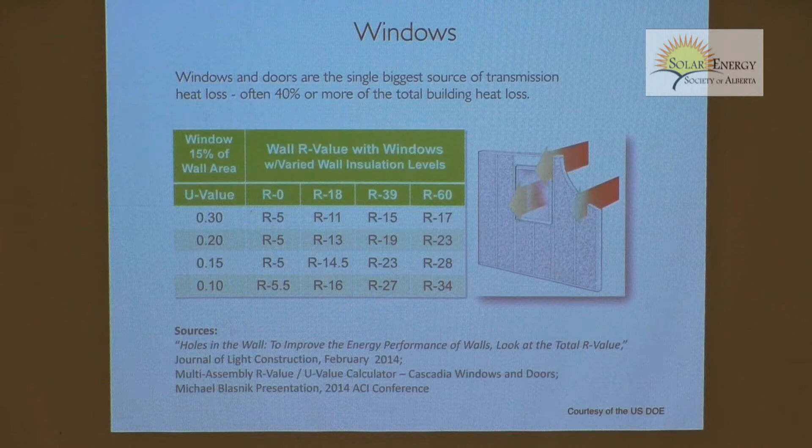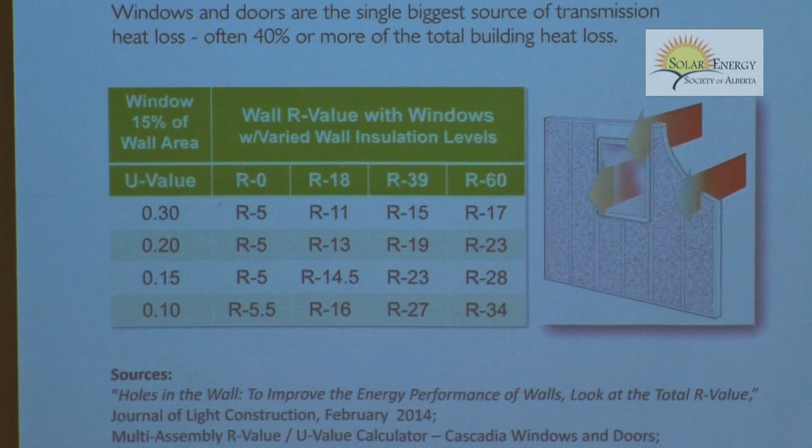After you've done all the other stuff, probably the biggest single source of heat loss left is windows, and this is a little chart that caught my interest. It just kind of shows how dramatically having windows in a wall affects the overall R value of the wall. So if you start out with a window with a U value of 0.30, flip it over, that's about R3, and you put 15% of it in an R60 wall, the effective R value of that wall drops from R60 to R17.

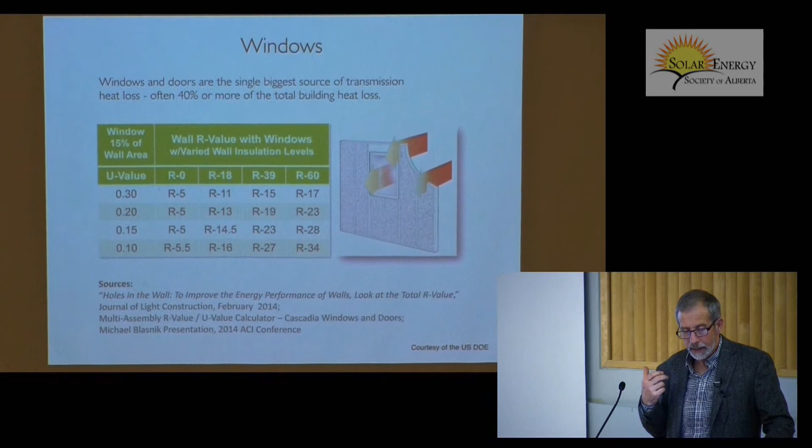If you get a lot better window, you can keep that reduction to R34, and it just, for me anyway, gives me a feel for how important good windows are. I'm not saying build a windowless box, I mean we need light just to function in a house, but just get good windows.

And in my little shopping list of windows, you want low conductivity in the glass, high solar heat gain on the south, low everywhere else is fine, low conductivity frames, small profile. The skinnier the window frame, the better. The good part's the glass, and that's the only reason you're putting it in there. If you've got a big clunky frame, you've got a hole with a low R value, and a whole bunch of it's not doing you any good.

The smaller you can keep that frame, the better. That's one of the reasons we like the fiberglass windows: low conductivity spacer bar and air tightness. There are now some triple glazed or triple weather stripped windows. We found actually a big chunk of our remaining air leakage can be the windows themselves. And then when you're designing the house, fewer bigger windows rather than a whole bunch of little ones, because the frames are where all the heat loss is. The glass is getting pretty good.

So then HRVs I treat as part of the building envelope, and we do the same sort of analysis. How many kilowatt hours a year is it going to save? How much is it going to cost? What's the cost per kilowatt hour per year? It should be about the same as where we stop at the conservation level.

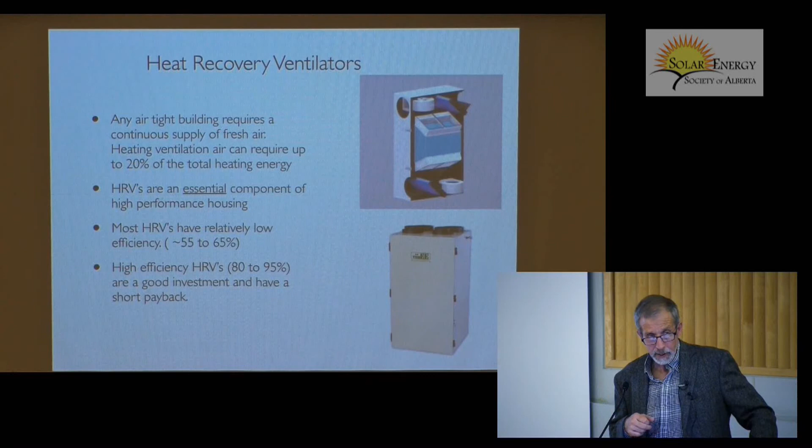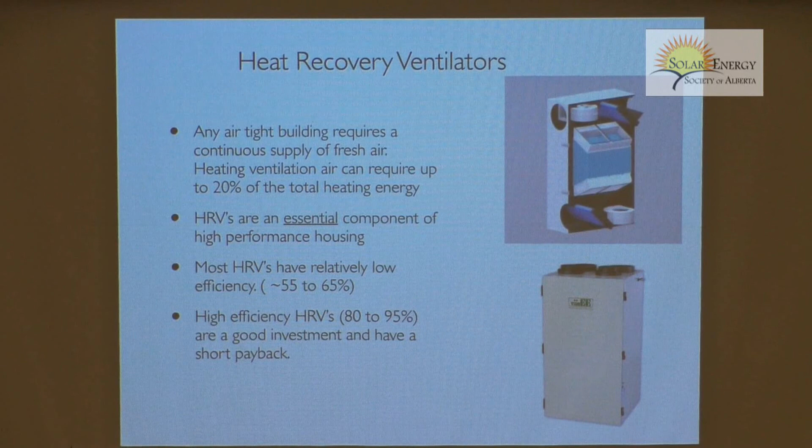We got all excited about Air Pohoda, that's the picture in the upper right. That's a Czech HRV that we thought was going to solve all the HRV problems: low electrical use, high energy recovery, dealing with moisture, no defrost, and it's turned out that they still need to do some work.

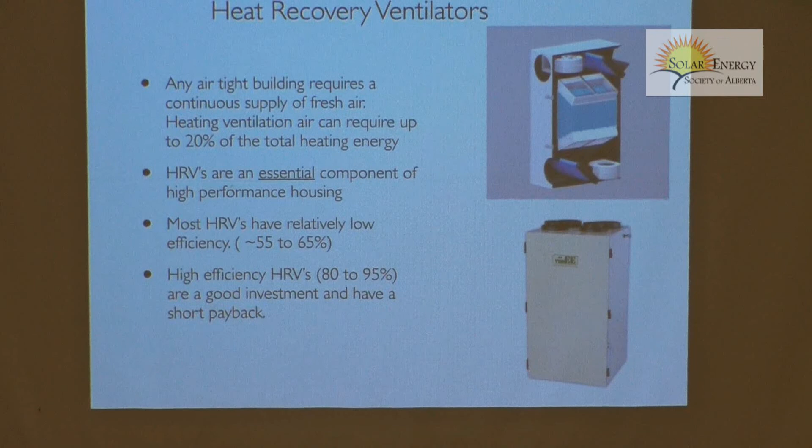Philip Meese here has got the first one commissioned, and he's doing a major research study for them, gratis, work that they should have done long before we got it here. But it's amazing: they are producing the efficiency, but they're building up frost, and we're cautiously optimistic they can solve this problem. But I wouldn't buy one until then.